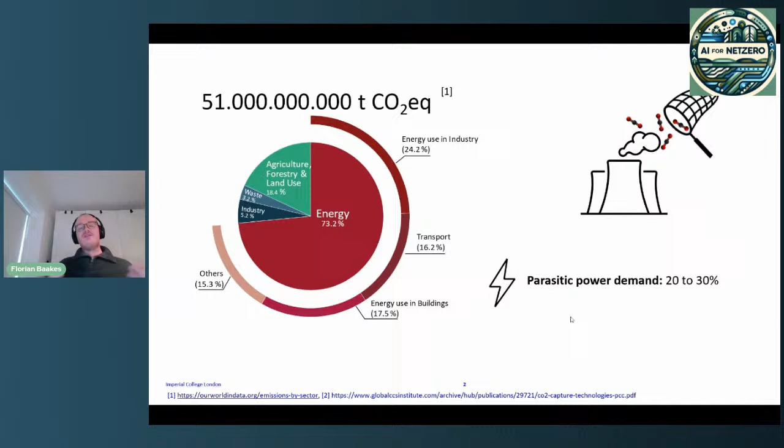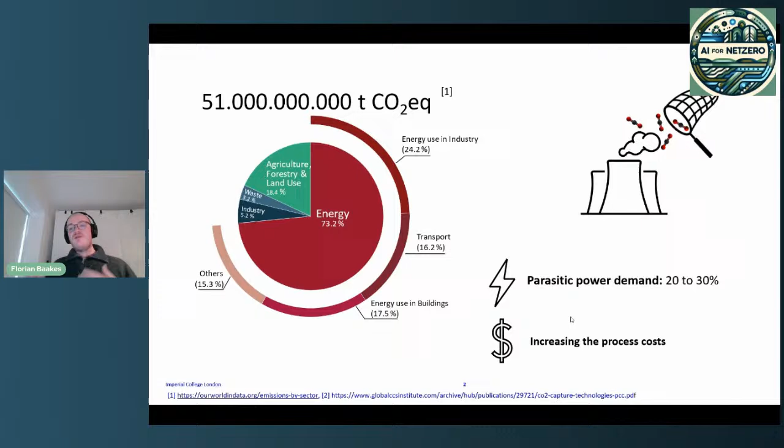If we now consider more conventional procedures to create energy, such as coal or gas-based power plants, we already know that the flue gas contains quite a lot of CO2. So the idea to simply capture and store, or even better utilize it, is actually very brilliant. However, the energy we need to capture and store it is quite high. We have a parasitic power demand of 20 to 30%, which reduces the amount of power that we can produce with the power plant, which then increases the process costs, while lowering the incentive of anyone running a power plant to employ carbon capture procedures.

So in optimizing these kinds of processes to lower the costs is definitely a goal we should follow. Now let me introduce the process I will look at today, which is an aqueous amine-based carbon capture process. Here you can see a typical flow sheet of this kind of procedure. On the lower left corner of the diagram is the flue gas, the CO2-rich mixture that enters the process, which might be a combination of carbon dioxide and nitrogen, or nitrogen and oxygen, depending on the flue gas we are considering.

On the top right-hand side, we see the mixture of our solvent. Here I show you monoethanolamine, which is more or less the gold standard right now, where already some CO2 is attached to it based on previous loops. In the very first stage, we have to bring our gas and liquid phases into contact, which allows the CO2 to be absorbed or captured by the amine molecules, separating it from the vapor or gas phase, which is then free to leave to the environment because it no longer contains CO2.

The CO2-rich liquid phase is transported to a heat exchanger to the desorber, where we increase the temperature of the liquid mixture, which loosens the bond and helps us separate the CO2 from the liquid or amine, allowing us to store it and hopefully later utilize it, or simply store it to mitigate its effect on the climate.

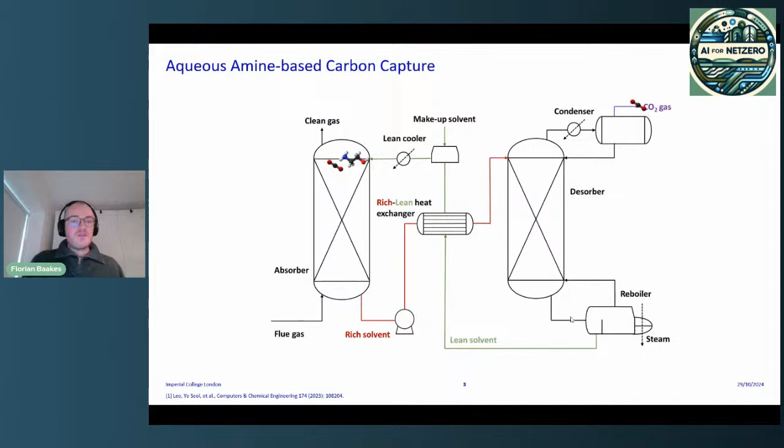Then the CO2-lean, or CO2-poor, phase is again transported to the same heat exchanger, giving back some of the heat it got before in the desorber to the rich mixture, and entering the absorber again so we can repeat the process with the same mixture.

Now the question arises: what can be optimized considering these kinds of processes? A known variable we can optimize is the lean loading—how much CO2 is already attached to the MEA once it enters the absorber.

Another direct thing to think about is the column sizing—how big our process really needs to be in order to work, as the pressure in the desorber is an important variable, and the absorber or the inlet temperature of the absorber can also be considered. But this only deals with the process conditions.

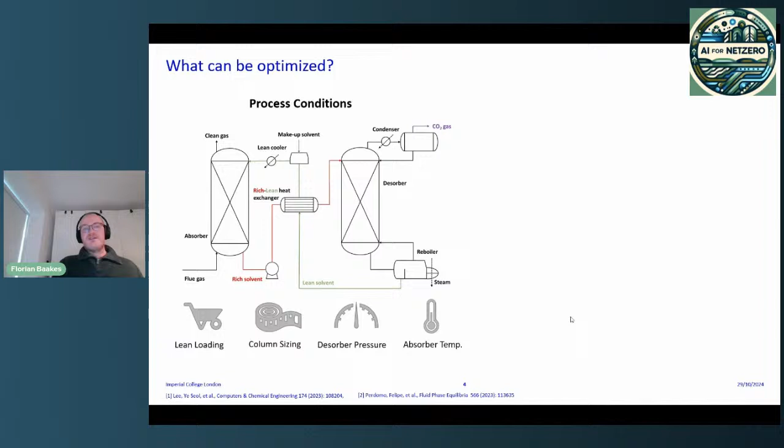If we think about the whole process, we could also deal with the molecule itself—the solvent molecule, what kind of solvent molecule we want to use in the process. And here we would have several choices.

Just to name a few: the already introduced MEA, which is more or less a gold standard, at least in academia and industry right now. But there are several other options, such as DEA, MDEA, or MPA, and this is already a very, very small part of the whole solvent design space.

So in an ideal world, the overarching goal of our project is to use machine learning in an integrated solvent and process design, where we optimize both together.

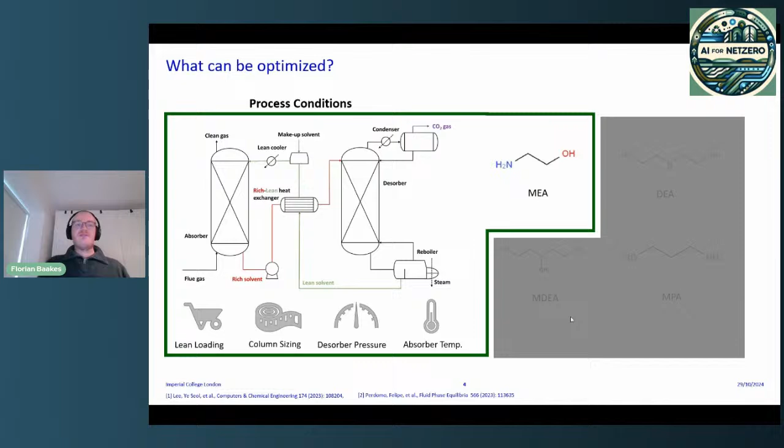However, for today's talk, we are not quite there yet. So I'm focusing on the implementation of machine learning models for an MEA-based process, and then discussing a little bit how that would extend to use in an integrated solvent design problem.

Now the next question that arises: why machine learning and how can it help? Well, these integrated solvent and process design problems can be very complicated and rather slow, and also might not lead to a robust convergence of the optimizer.

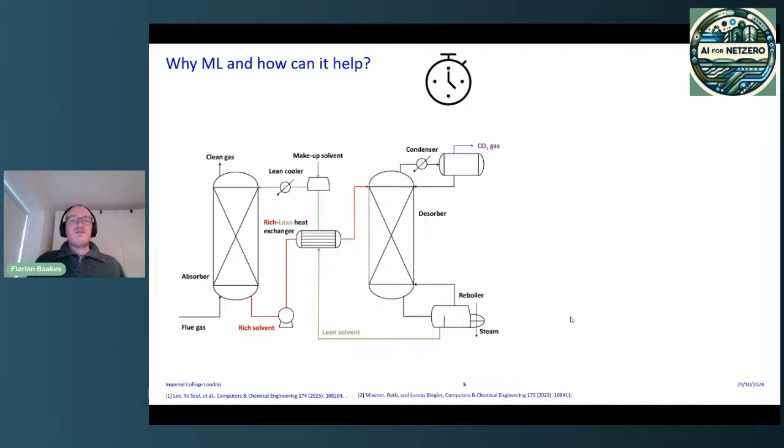What we promise ourselves by introducing machine learning, which is also quite well known, is that it should be faster than the model we are replacing, and hopefully also more robust, which is something I will try to discuss a little bit later.

So after discussing why we want to do it, the question now arises how we can do it. There are several ways to introduce machine learning models into the process optimization, one of which would be a process surrogate, where we replace the whole process by a machine learning model and then optimize our surrogate. Another way would be a unit surrogate, where we replace a unit, or a property surrogate, where we replace property calculations.

Such as, for example, viscosity, surface tension, or in this case, the flash calculation, or the calculation of the equilibrium—how our molecules distribute between the liquid and vapor phase, which is obviously a very important attribute in this kind of process.

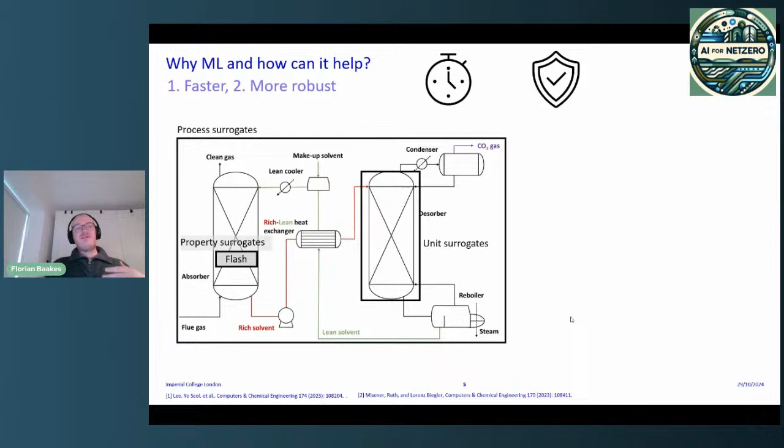Since I already introduced that the overarching goal would be to move toward solvent design problems, the process and unit surrogates do not really make sense for our kind of problems. So we would deal with the property surrogates.

And as already introduced, I will deal with the flash calculations—the equilibrium calculations that deal with how these separate between the liquid and vapor phase.

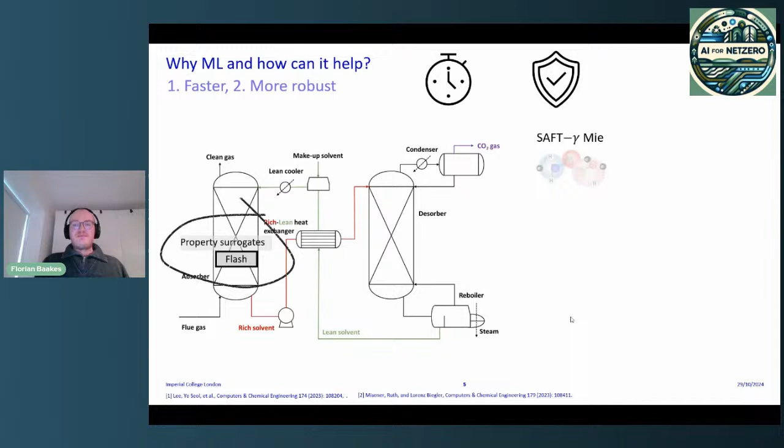The model that I want to replace is the SAFT-gamma-Mie equation of state, which basically allows us to calculate the properties of a given molecule based on constitutional groups, which is also very handy when it comes to the solvent design part.

But now we want to replace it, because the TP flash using SAFT-gamma-Mie is known to be rather slow and also might have some convergence issues.

And how we did that: we sampled the SAFT-gamma-Mie-based TP flash model in the parameter region that we know is close to the processes, or within the bounds of the process optimization that we have.

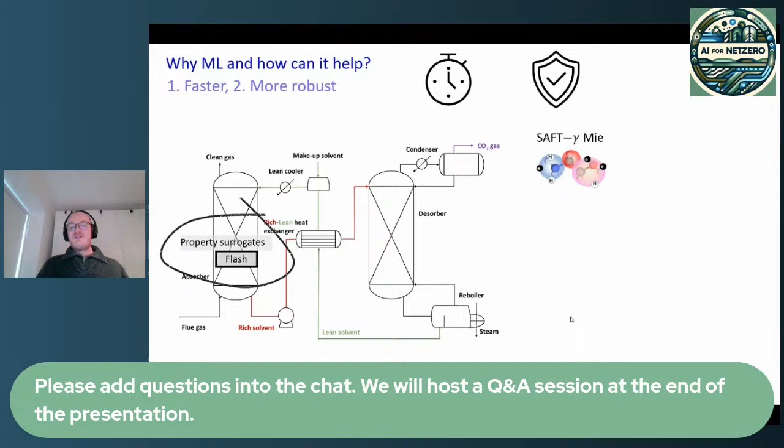We then curated our data using Python, and used the PyTorch framework to train our machine learning surrogate, which is an artificial neural network that we then translated to C++ using libtorch, which is basically the C++ equivalent of PyTorch, so we can reintroduce it into our process model, calculated using the process simulation software gPROMS.

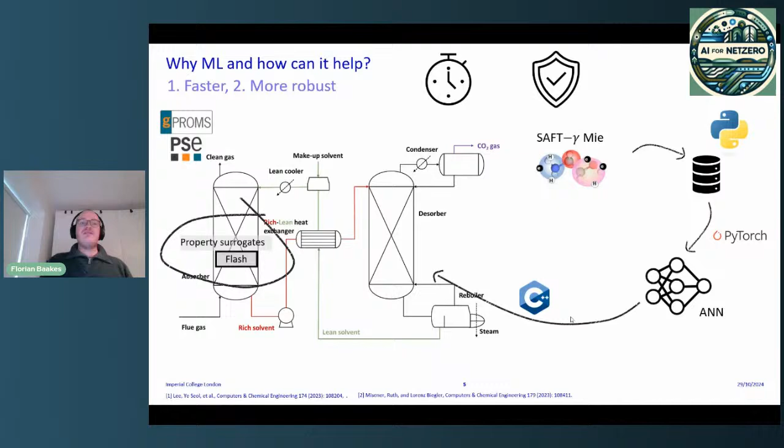And now we look a little bit more into the details of our ANN architectures and look at some first results here. The considered mixture is water, MEA, CO2, and nitrogen, which is practically the basic mixture that we have to consider when dealing with these kind of plants.

Since we want to replace our equilibrium calculations that would previously be calculated using TP Flash algorithms, the first idea was to use features for the ANN that are the variables we would usually use to calculate the Flash calculations. So we use the temperature, the pressure, and the global composition - how much water molecules do we have in total, how much MEA molecules we have in total, and so on. We use 2 hidden layers with 20 nodes in each layer.

A rather important detail here is that we use the SiLU activation function, because the more commonly used activation function ReLU has the problem that when we want to calculate the derivatives, this gives us non-smooth derivatives. Since the optimizer we want to use to optimize the process later is a gradient-based or derivative-based optimizer, having non-smooth derivatives might lead to the optimizer getting stuck or not even being able to converge. But using a smooth or differentiable activation function such as SiLU deals with this kind of problem.

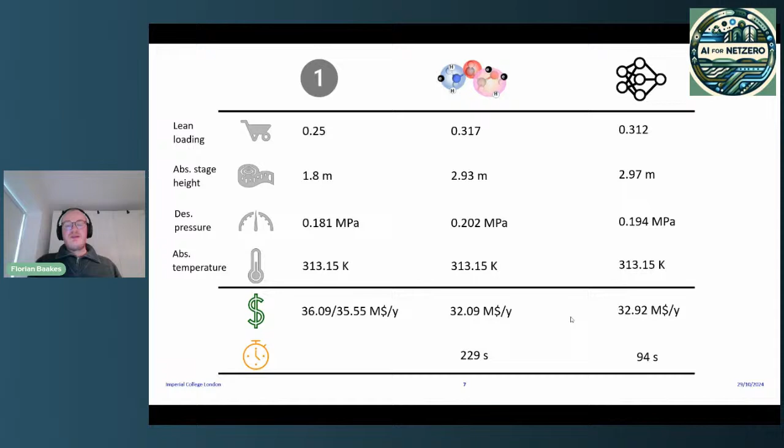Another point I wanted to investigate was the robustness of our model. Since we are not yet in the solvent design space, I looked into this by sampling points of our variables where we know there are feasibility issues, such as the desorber pressure and the lean loading, then saw how well each process model samples the space and how big the feasible region is in this combined parameter space.

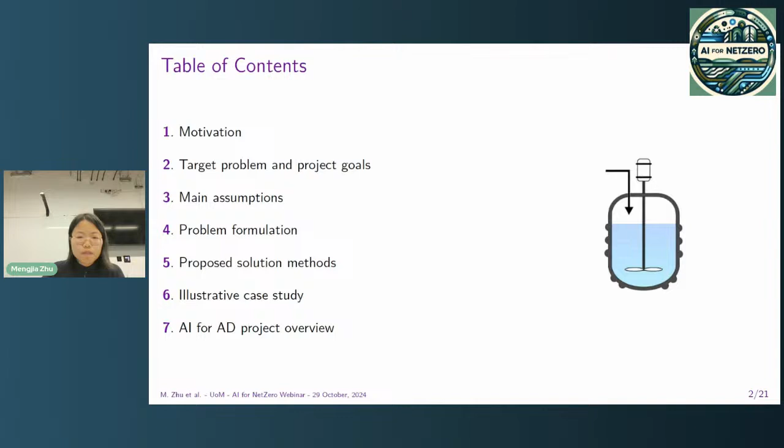For bioprocess industries, including pharmaceuticals, biotechnology, and food production, they often rely heavily on biological systems to produce products of consistent quality and yield. This is to minimize waste and enhance economics. However, biological processes are inherently variable due to complex and often poorly understood interactions within living organisms. We often utilize process optimization and quality control techniques to control the process. In order to do that, we often perform a system identification approach for which we develop a mathematical model that describes the system dynamics. With that model developed, we can then develop relevant control strategies.

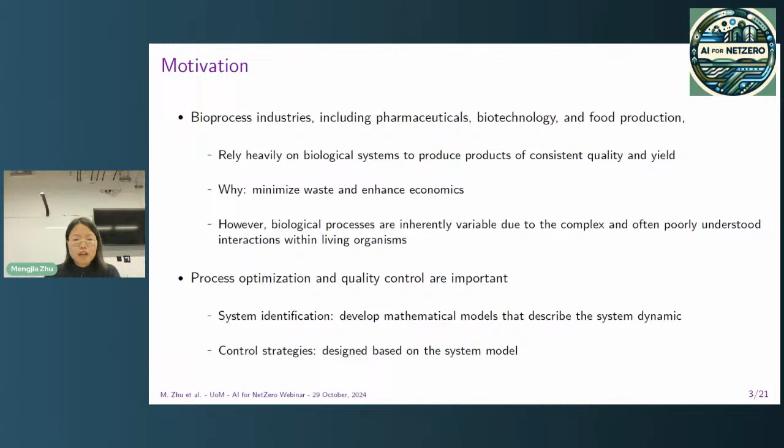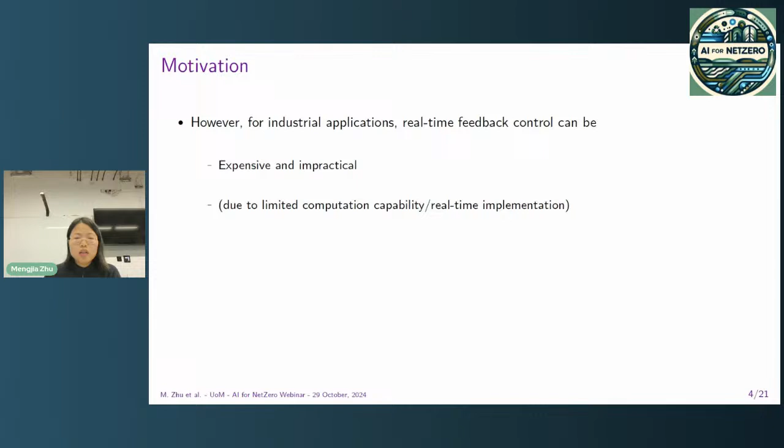However, a lot of times for industrial applications, if we want to do real-time feedback control, it can be very expensive or sometimes impractical. This is because we may have limited computational capacity, and it may also be difficult to do real-time implementations.

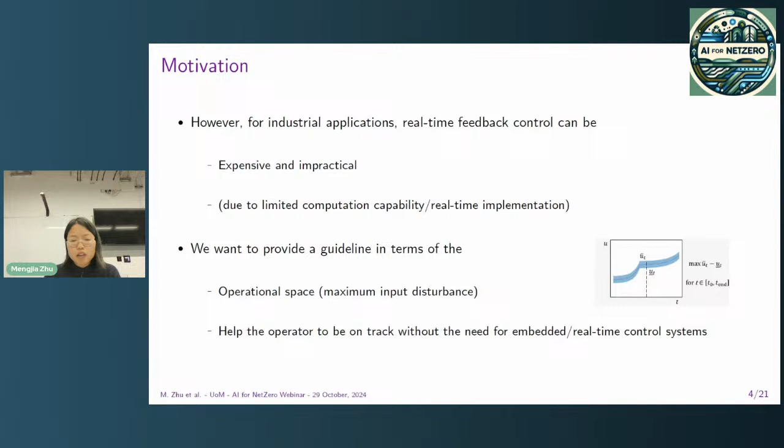With that being said, we want to provide a guideline in terms of operational space in this project. Specifically, we want to develop this operational space such that the operator can stay on track without the need for embedded or real-time control systems.

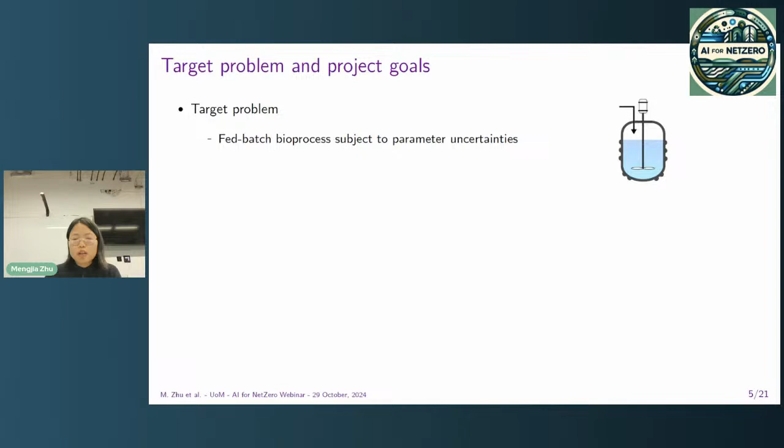On this slide, I show the target problem that we want to solve. Specifically, in this project, we will focus on fed batch bioprocess subject to parameter uncertainties involved in the system identification step. The goal is to find an operational space for a given reference control input trajectory, such that if the control input stays within this identified operational space, regardless of the parameter uncertainties, we should be able to achieve satisfactory performance of the process.

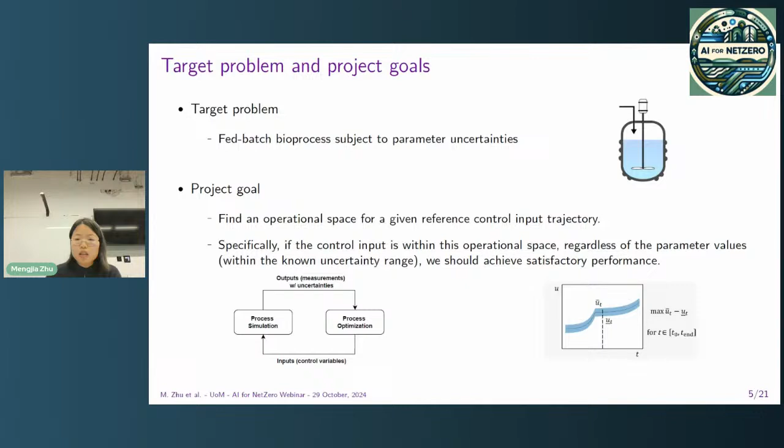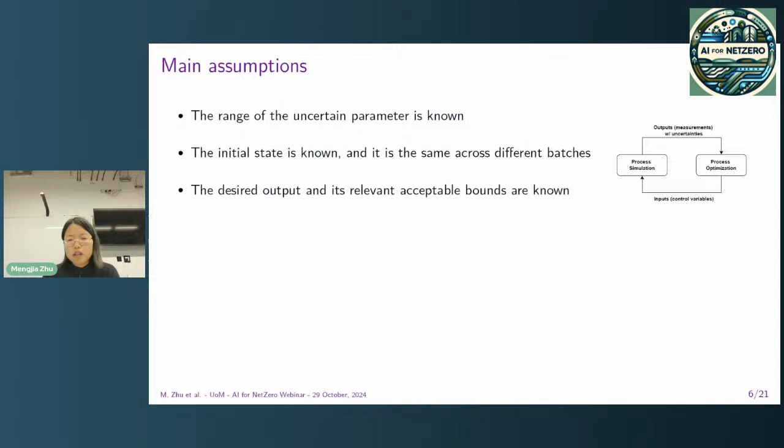Some main assumptions are listed on this slide. Specifically, we assume that the range of the uncertainty parameters is known, and also the initial state is known, and is the same across different batches. The desired output as well as the acceptable bounds are also known.

We assume that the control input can be time varying and the reference trajectory is known, either calculated or provided based on nominal operations. So the operational space we want to define can also be time varying. We assume we operate on a fixed time horizon and that the system dynamics are known.

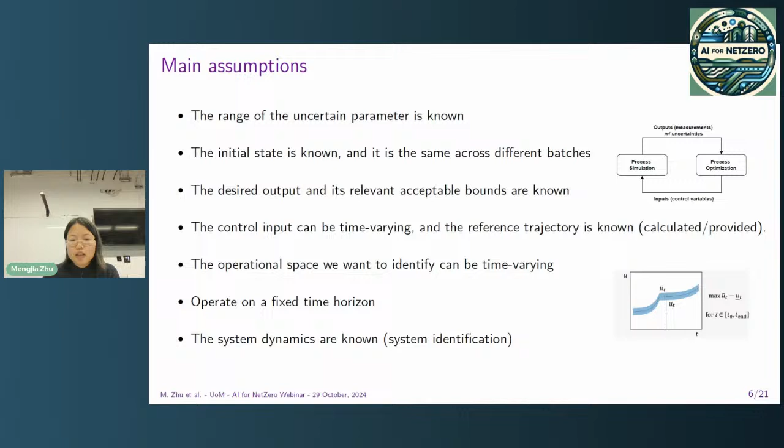With that, we want to show the problem formulation. Specifically, we will consider the dynamic system of a fed batch bioprocess. It can involve multiple states, modeled with the following ordinary differential equations. Here, X is the vector that collects all the states.

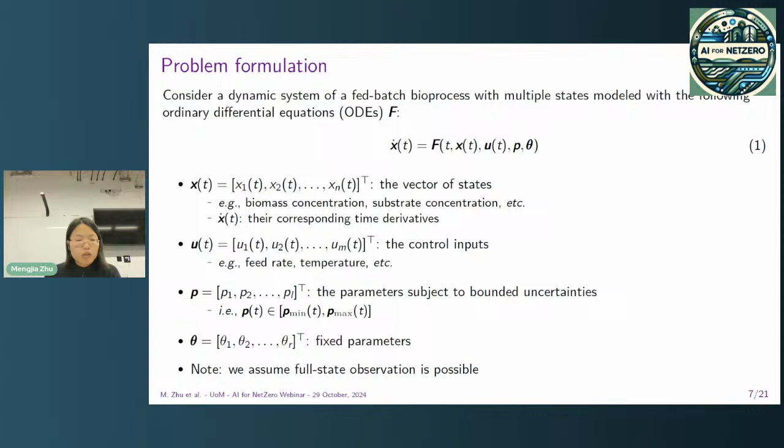For example, for a bioprocess, it may involve biomass concentration and substrate concentration, and X dot is their corresponding time derivatives. U is the control input, for example feed rate or temperature. Here we use P to collect all the parameters subject to bounded uncertainties, and theta to collect all the fixed parameters. We also assume that full state observation is possible.

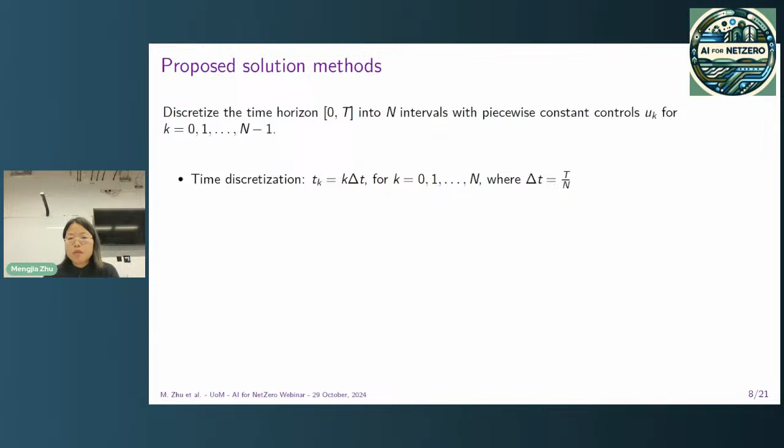In the following, I will discuss the proposed solution method. Specifically, we will first discretize the time horizon into n intervals, and in each interval implement a piecewise constant control. Then we reformulate the problem as an optimization problem with the objective to maximize the operational space, while also satisfying all the system constraints.

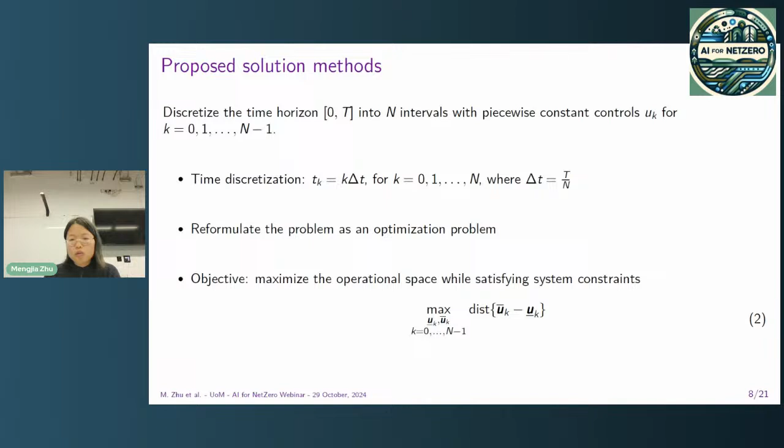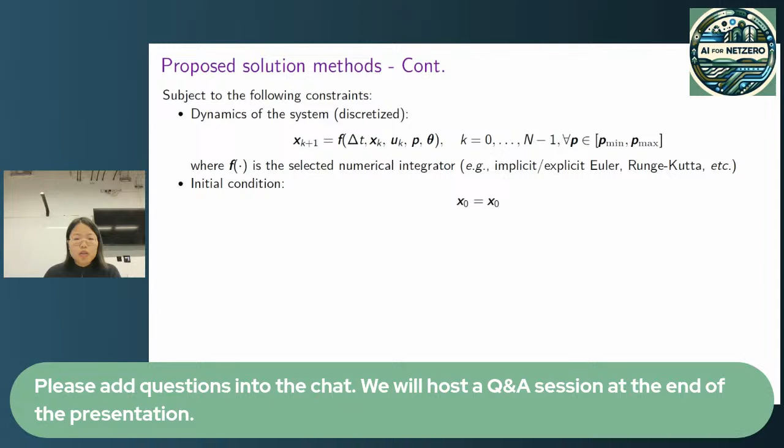For example, we need to respect the system dynamics. Here, with the discretized system, the next state can be calculated based on the integration of the system. You may use a selected numerical integrator to obtain the state. Also, the initial state should be respected.

Some path constraints and terminal constraints may also be involved. An example of a path constraint can be that the rate of change of substrate concentration should not exceed a certain value to avoid the process becoming unstable. An example of a terminal constraint can be that the final production should be higher than some target value.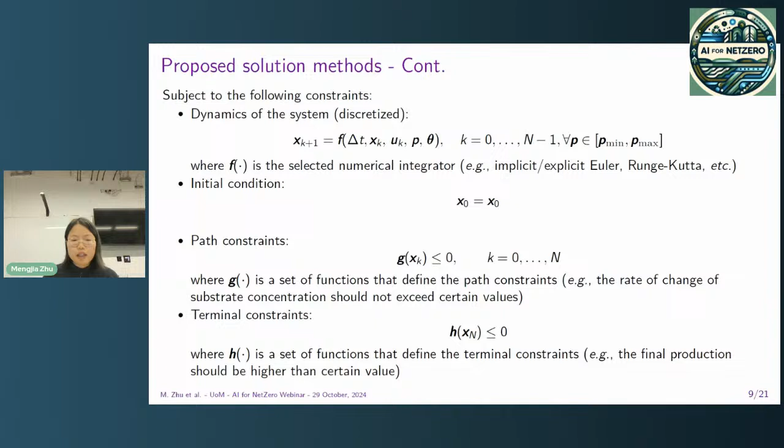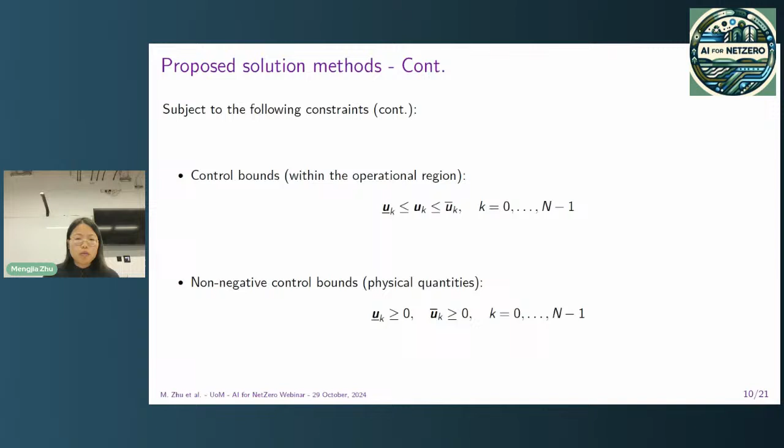Additionally, we want the operation to stay within our defined operational region, and these upper and lower bounds are the ones we want to determine later. Also, the control should be positive to be physically valid.

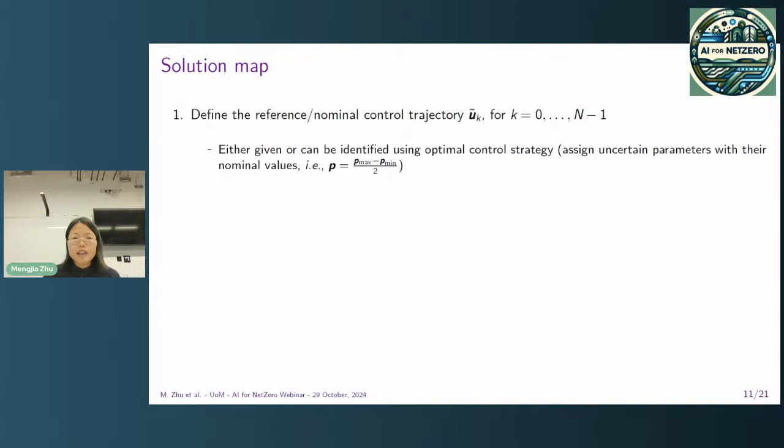The solution involves certain steps. First, we want to define the reference or nominal trajectory. This can either be given based on nominal operation or identified using an optimal control strategy. In this case, we can first assign the uncertainty parameters using their nominal values.

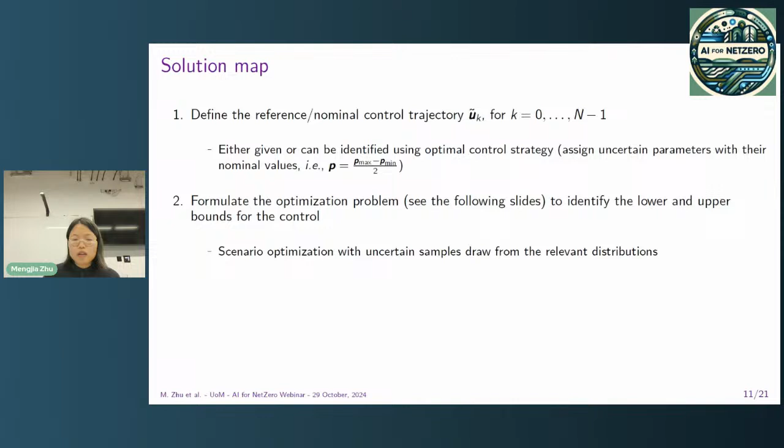Then we formulate the optimization problem, which we will discuss in the following slides, to identify the lower and upper bounds for the control. In this case, we will use scenario optimization with uncertainty samples drawn from their relevant distributions. Lastly, in order to validate the identified operational space, we will sample from the uncertainty parameters on a larger test set and then test if there are any violations.

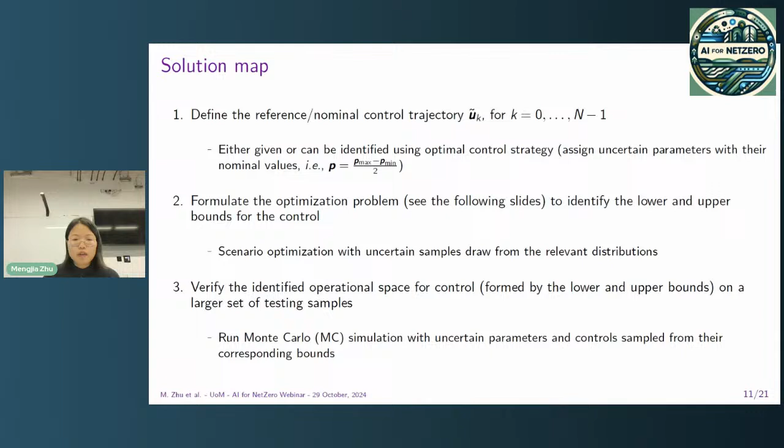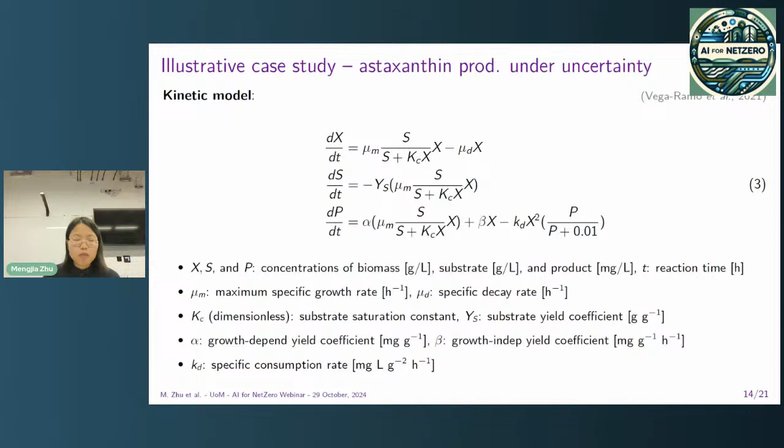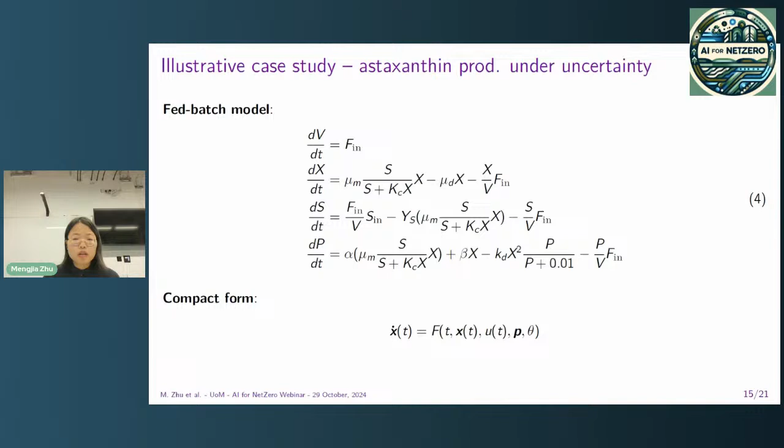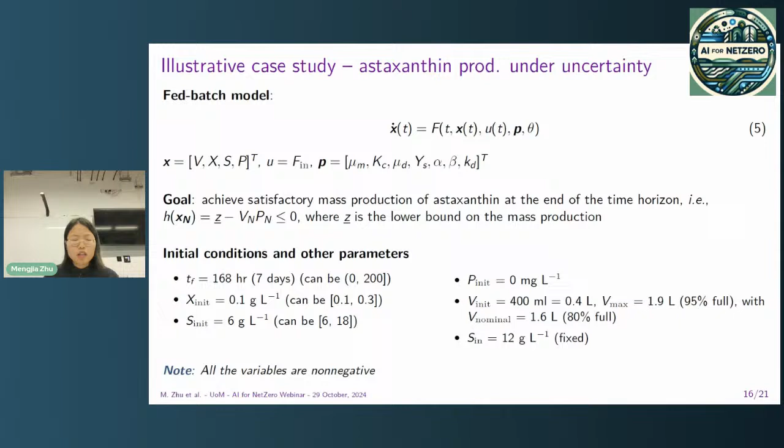We identify this operational space by applying our approach. Here you can see that the operational space is increasing as time goes. This is because we also implemented an additional constraint that we want the operational space to increase over time. The rationale is that if we adhere to the operational space initially, we have more variability at the end as time goes. This shows the flexibility of our approach.

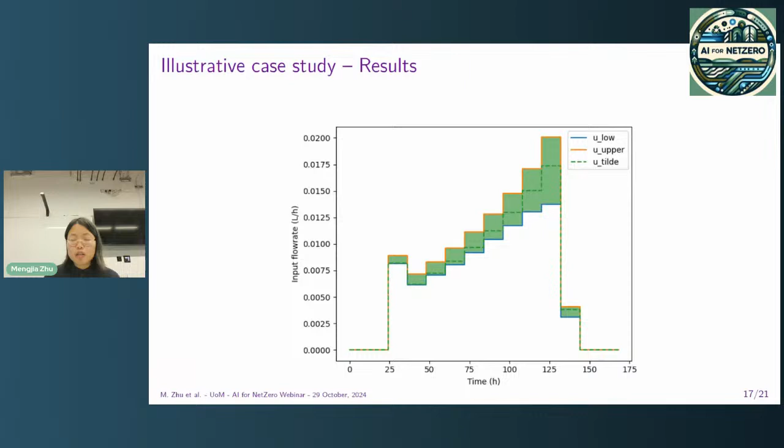For example, if you know at a certain time step the operation is critical and you want the variation to be minimal, you can impose the relevant constraints to enforce that.

We also validated the operational space using a large testing sample, in this case 10,000 samples. The parameters as well as the operation control trajectory are sampled from their uncertainty bounds. Here the leftmost bar indicates the terminal constraint, and as you can see, there's no violation.

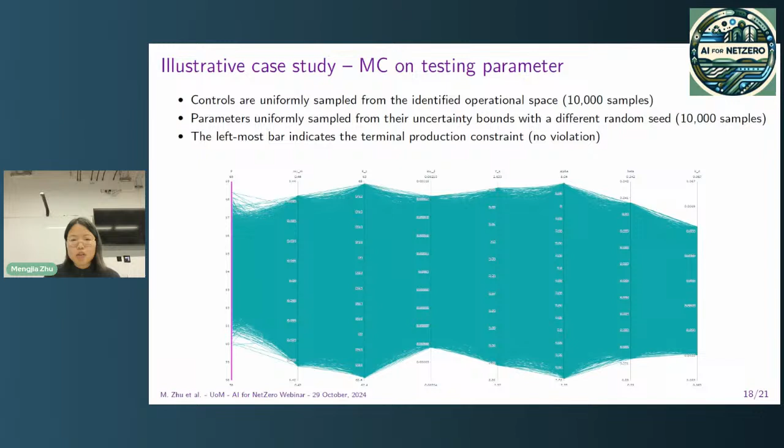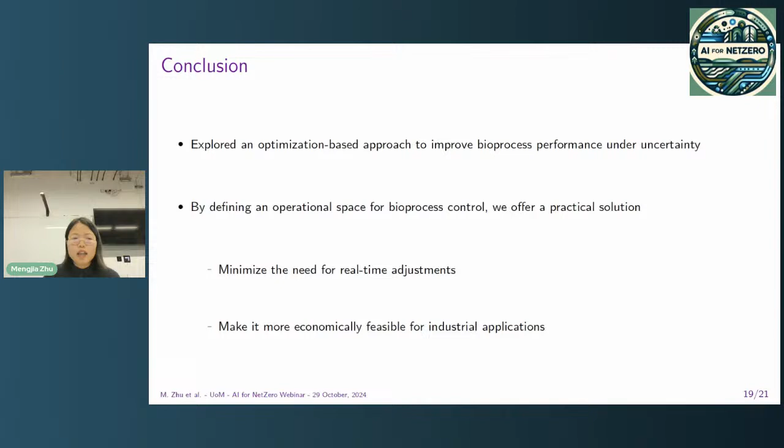In conclusion, in this project we explored an optimization-based approach to improve bioprocess performance under uncertainty. By defining an operational space for bioprocess control, we offer a practical solution that can minimize the need for real-time adjustments, making it more economically feasible for industrial applications.

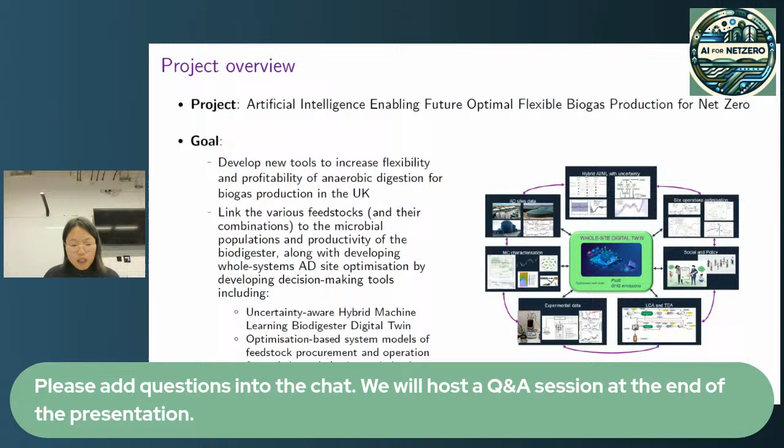At the end, I also want to look at the broader context. Specifically, this research is part of a larger AI for Net Zero initiative. The project is focusing on enhanced biogas production, and it aims to develop tools that can increase the flexibility and the profitability of the anaerobic digestion process.

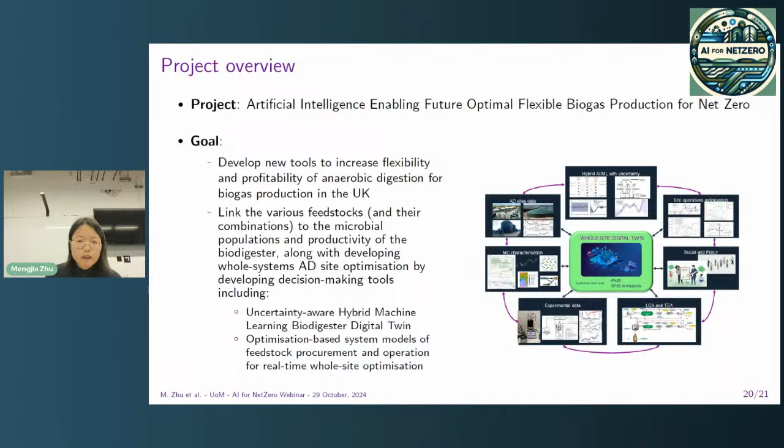That's all for my presentation, thank you for your attention. I'm now happy to answer any questions you may have. Thanks.

Thank you. Amine, you're muted. Yeah, thank you, Mengjia, for your presentation. That was crystal clear, and that's amazing. So if anyone in the audience has any question, please leave their comment on the chat box so we can ask Mengjia about it. Meanwhile, Ahmed, if you have any question, please feel free to ask.

I always have questions. Excellent presentation, Mengjia. There are a lot of details, I caught only part of it. One of the questions which comes to my mind is the limitations of the assumptions. For example, you have known and fixed initial conditions. Are these strong assumptions? Another assumption is full observability of the system.

How do you think of the limitations imposed by these assumptions?

Mainly because this approach relies heavily on a system identification step, and these assumptions are also mainly imposed for that step. If we have a proper system model, then this assumption can be alleviated. But usually, in order to have a good system model, these assumptions are often necessary. Of course, there are different techniques, for example you can use a Kalman filter and different ways to help alleviate this. But just to simplify the assumption for this current project, we decided to assume that.